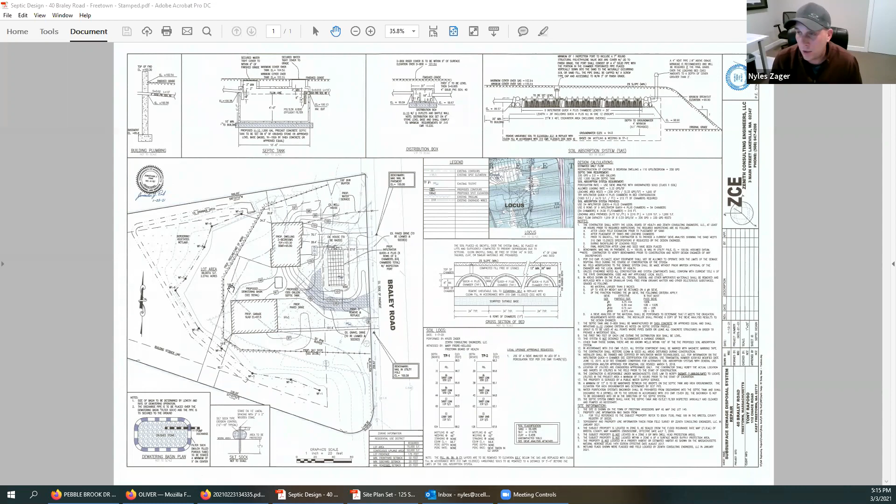Sure. But we are providing the downspout with an overflow, and basically what we can do is we can create a pad where the overflow is to ensure that there's not going to be any erosion, because that's a very good question. We can absolutely add a stone pad or something of that nature to ensure that it's going to dissipate properly and not just concentrate the flow and go right directly into the wetland. Yeah, so, all right, so if we would just condition that, then your client would be amenable to that. I think it's a good solution to the problem, though.

Great. All right. Is there anybody here from the general public who has any questions, or anybody from the board that has questions? I'm good, Kevin. All right, excellent. Victoria, you don't see anybody raising their hand, right? No, I don't. Okay, perfect.

All right, if there's no other questions, again, relatively straightforward. The house being moved to a different location is going to meet current setbacks and zoning, and it is a previously disturbed area, and it's going to be maintained a residential use. So, again, not too much to do with conservation with the use, but just like to keep everybody clear on that. Okay, so that being said, if there is nothing else, then I'll entertain a motion. We close the public hearing. I'll make that motion. Excellent. I'll second it.

Motion's been made and Charlie supported. No, that's great. If there's no further discussion, roll call vote. Charlie Sullivan. Aye. Charlie Sullivan, aye. Keith Mello. Aye. Keith Mello, aye. Kevin Damaris, aye. Okay, so again, this being a notice of intent,

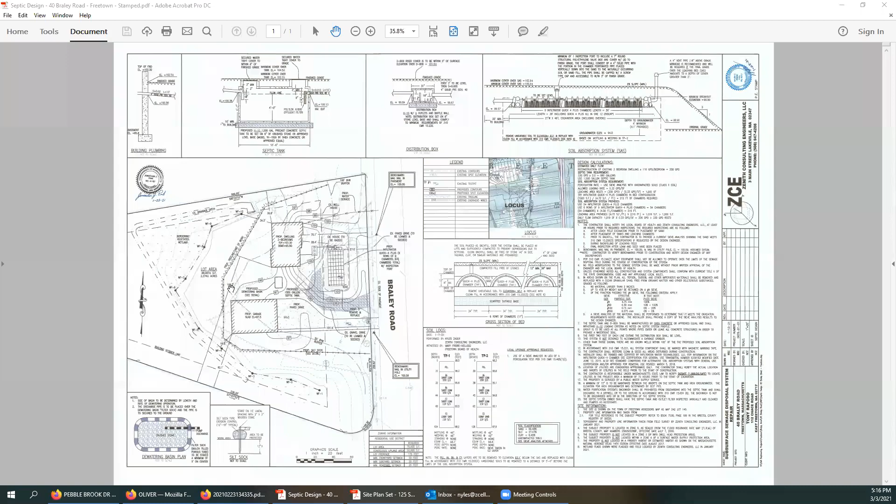and then I would entertain a motion that we accept the plans as submitted and approve the plans as submitted with the condition that at the downspout locations on the proposed garage... Before I entertain that motion, Nyles, would the same thing hold true for the dwelling? That is correct. All right, so I'll entertain a motion that we approve the plans as submitted with the condition that at all downspouts, there be a downspout and rain pad installed to prevent any kind of further erosion down the line. I'll make that motion.

Excellent. I'll second it. Thank you. Motion made and supported. There's no further discussion on the motion. Roll call vote. Charlie Sullivan. Aye. Charlie Sullivan, aye. Keith Mello. Aye. Keith Mello, aye. Kevin Damaris, aye. So again, just to reiterate, the board's given me permission to sign in their stead. So once this document is done and Victoria's got all the paperwork in order, we'll get it signed and get it back to you, okay?

Appreciate it. All right. So next item on our agenda, number 3. So don't go too far, Nyles. I believe you're on this one also. Excuse me. Sorry, folks. This is for a notice of intent filed for 125 South Main Street. This is for a construction of a multi-unit 55 and over project on South Main Street, at 125 South Main Street. So again, this is one of those that we called to order at the last meeting. No testimony, no evidence was presented at the last meeting.

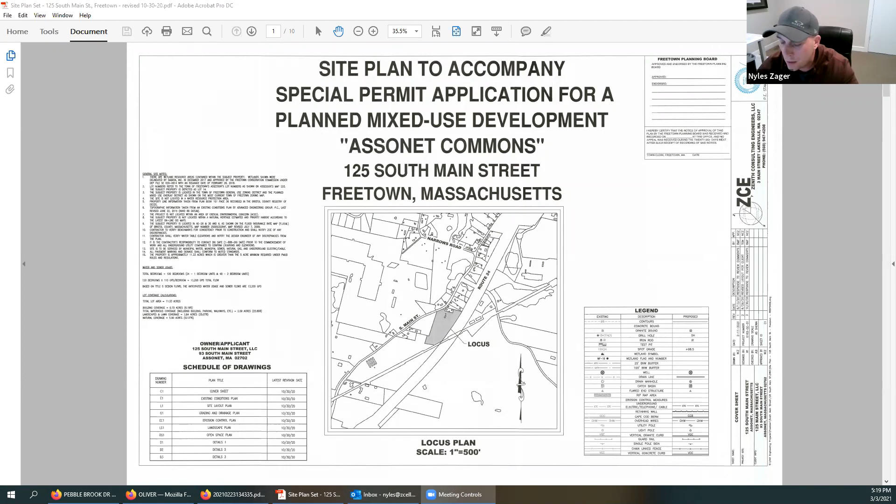All right, so this property is located at 125 South Main Street. It's approximately 11.33 acres, and it's located in the P-MUD District, which is the planned mixed-use development district. The wetlands that you see before you, which I will go to the existing conditions plan, were actually flagged by Bob Gray of Sabatia and approved through an ORAD issued by the Freetown Conservation Commission. All noted on the plan as well.

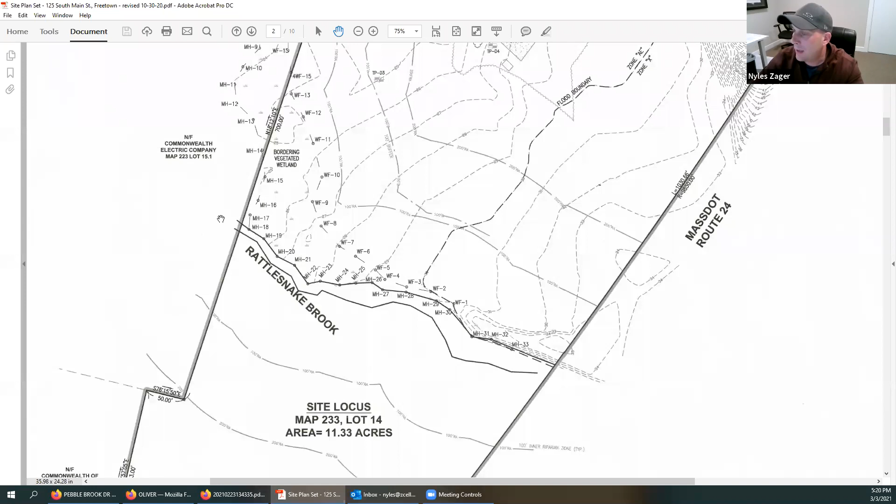The property is not located within an ACEC, area of critical environmental concern, and is not located within any natural heritage areas. It is located within flood zone AE 26 and a flood zone X as well. The Rattlesnake Brook, which is depicted here, as I move my cursor, kind of bisects the parcel, as you can see. So this is the entire parcel. Rattlesnake Brook is here. The portion of the work that we're proposing is going to be on this side of the property. Let me go to the next sheet. This is a layout sheet of the development.

We're proposing two 36-unit apartment buildings, which are to be age restricted, 55 plus. So again, that's a benefit in the PMUD district that you can get extra units based off of the age restriction of 55 plus. There are a total of about 164 parking spaces that we're providing. There's basically one garage space per unit for the 36, so 72, and then one driveway space for each unit as well. And then there's 20 additional visitor spaces, 10 here and 10 also here.

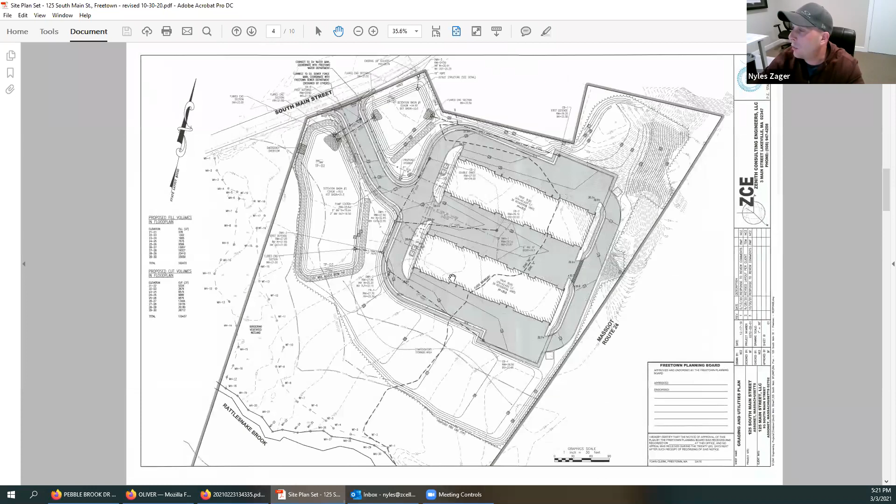Stormwater. So this is the grading and drainage layout overall view. Basically there's 6 catch basins that are going to capture all the water and direct it through drainage piping into the 2 detention basins that you see. This is the larger of the 2 detention basins here that overflows and then goes into this detention basin here as well. And then after a 100-year storm event, it overtops and goes into the existing drainage where it currently goes out into South Main Street in the piping and then discharges out into the town layout.

There's 3 different what's called First Defense units in the catch basins that we're proposing. Basically what those do is they treat stormwater, TSS removal, total suspended solids, as well as water quality volume. They're a really good unit. They're the precast unit that fits inside the catch basin. And they're a standard unit that we've used many times and work very well.

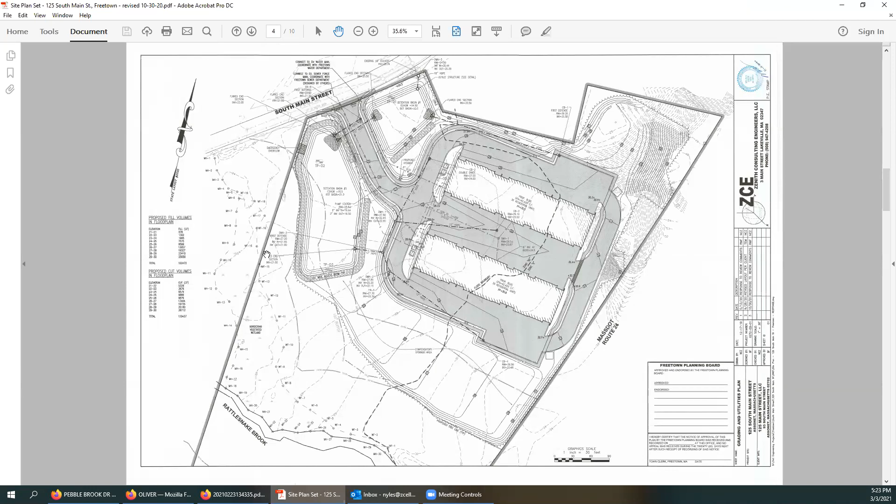The basins that you see have been sized to meet the 100-year storm event, meaning they can handle 7 inches of rain in a 24-hour span for all the area contributing to it, including all the proposed development. All the work that's located within the flood zone, which is depicted with this black dotted line here. All the AE 26 would be to the west of that line for the most part. It's all to the west of it, and that's all in the flood zone.

All the work that we're proposing, we are meeting all the compensatory storage for that work. And that's all been compensated for. There's actually calculations on this sheet as well that show the proposed fill volumes to each elevation, as well as the cut volumes to ensure that there's no flooding impacts downstream.

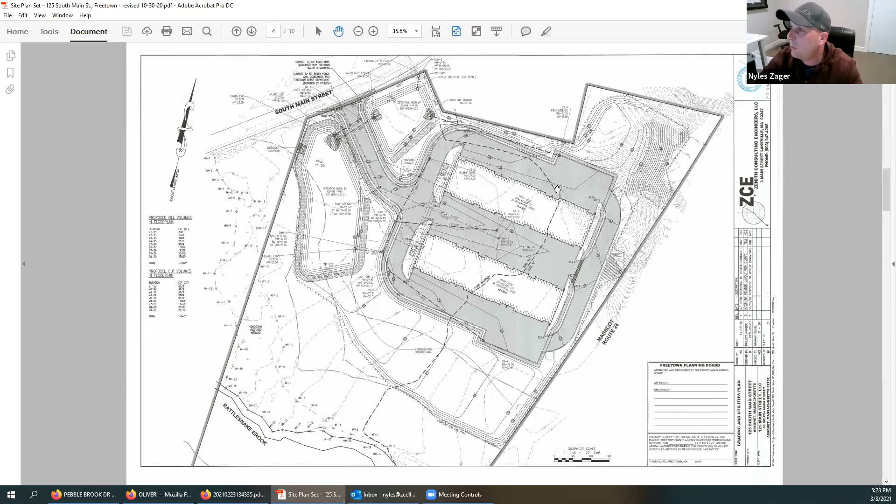As far as erosion control, this is the main important plan as far as conservation goes, and what you'll really be concerned with as a commission, is all the erosion control measures. It has all the details as far as the silt sack, the silt sock, dewatering basin, the entrance pad. So basically the limit of work is this black dotted line here that runs up and then runs along. The erosion control is all downstream here and is depicted on the plan here.

There is also a construction entrance pad, which we have a detail here. Essentially what that's for is during construction to ensure that when heavy equipment or any equipment is coming in and out, it mitigates the amount of silt, dirt or anything of that nature that gets out onto South Main Street. And there's also measures in place as far as sweeping and things of that nature that the contractor has to meet to ensure that there's no danger to the public.

The dewatering basin is depicted here. The last site that I spoke about, 40 Braley Road, was definitely more of a concern with water table. This is a much sandier site, and water table is definitely not as much of an issue on this site. But again, you never know if you're going to encounter it. And if we do, we provided this dewatering basin that the contractor will have to utilize in the event that water table or groundwater is encountered.

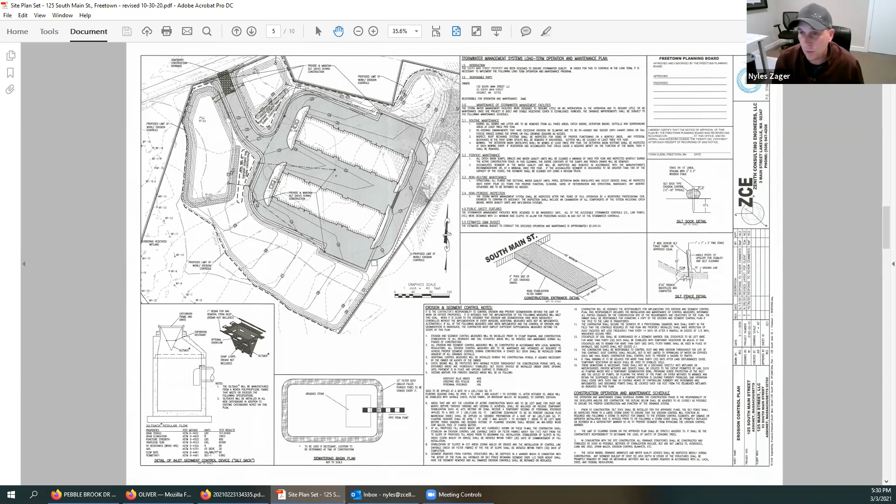Okay. Thank you. If there's no other questions, me serving on the planning board, I have a level of comfort having looked at this a number of times and knowing it was reviewed by EPG. Ordinarily we do these concurrently, so we would have all been on the same page. But if anybody has anything else to add, if not, then I'll entertain a motion that we close the public hearing.

I'll make that motion. I'll second it. Thank you. Motion made and supported. For discussion, roll call vote. Charlie Sullivan, aye. Keith Mello, aye. Kevin Damaris, aye. Passes unanimously.

Okay, so, it's interesting. This is the first one that we've had in town under the PMUD, and there's been a lot of interest from local seniors in this project. It being a 55 and over, I think it's generated a bit of excitement in town. Not that the Conservation Commission should consider those things, but I think it's neat to recognize because it is our first one in town.

It's important to note too, it's going to be serviced by town water and town sewer. I can't remember if you mentioned that, Nyles, but that's why there's no septic system on site, which is another plus given that it's in the flood zone and the necessary evils of constructing a septic system within the flood zone. So if there's nothing else, I will entertain a motion that we accept the plans as submitted. There's no other conditions that I would impose upon this project at this point in time.

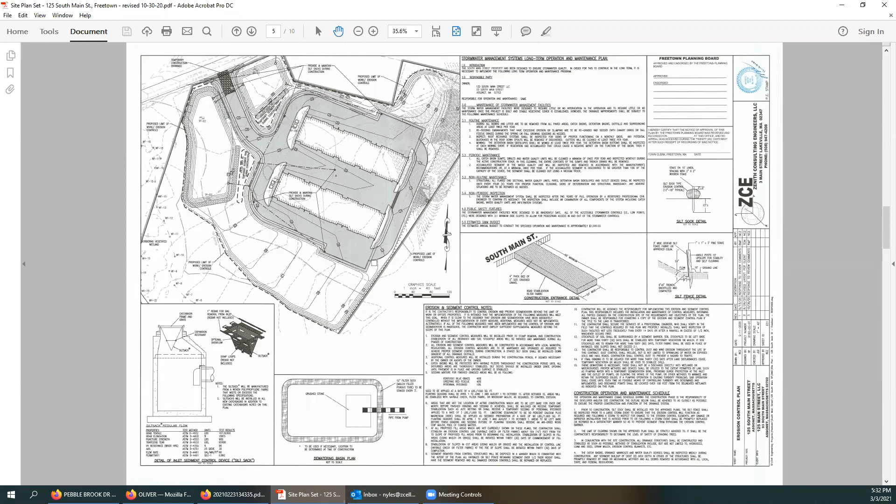I'll make that motion. Second. Thank you. Motion's made, supported. If there's no further discussion on the motion, I'll take a roll call vote. Charlie Sullivan, aye. Keith Mello, aye. Kevin Damaris, aye. Passes unanimously.

Just like the last time, we'll get this signed, the approval written up, and we'll get it sent out to you. Thank you very much. You're welcome, sir. Have a great night. You don't have anything else for us tonight, do you? I do not.